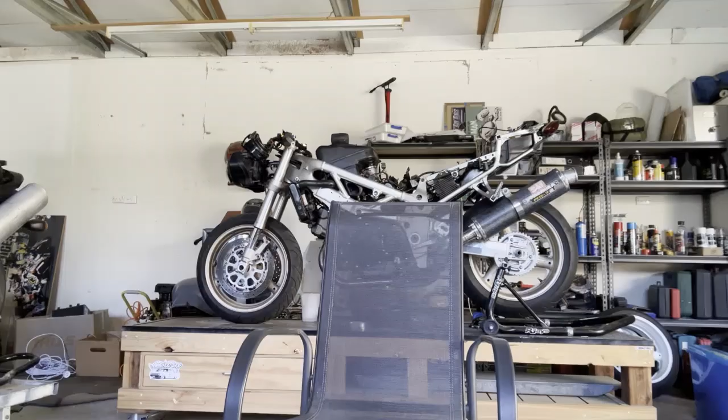Welcome. So what we're going to do now is we're going to do shim replacements for a TLR and a TLS. We're going to do one, both of the same procedure.

So when you're going to do your shims on the R or the S, there's certain tools that you need because you need to take parts off the R and you need to take parts off the S.

But for the purpose of this, when you're just going to do your shims, you need a feeler gauge. I've got a feeler gauge. I take all the bits off because it's a lot easier to handle, I just use the individual bits. You'll need an Allen key, 10mm. Another Allen key, 8mm and 6mm. You need 10mm.

You will need a torque wrench with the 10mm socket, a little 10mm socket. This mill that's a 17mm, so you need that as well. That's for your generator bolt.

Vernier calipers, liquid paper or a marking pen, preferably one that you can see. White, I use this, it's easy. And hands free, like a magnet. Trust me, you'll need it.

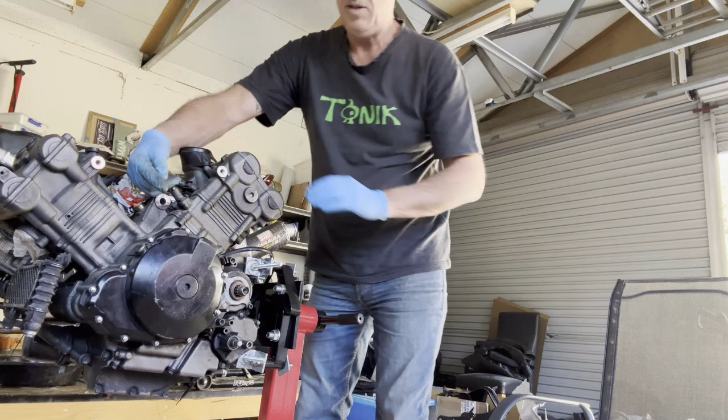So for easy reference, this is how the bike is sitting in the frame. So on the right hand side, the bike rotates in a clockwise direction. So if you think in a clockwise direction, and if you continue doing a clockwise direction, when you get to the left hand side, it's actually anti-clockwise.

So you've got to turn this generator to get it to TDC, and you don't want to be reversing the engine because the cams, sometimes the chains, they can kink. So you always want to go in an anti-clockwise direction. You can do small adjustments by doing it clockwise to get the line on, but we'll show you - majority anti-clockwise on the left-hand side of the R and the S.

So you're about now to start doing the engine. Okay, so just to recap, you've lowered the radiator, you've taken off the fairings on the R. This is for the R. You've taken off the fairings on the left-hand side. You've taken the battery out. You've disconnected the battery box.

I think that's the other way around, you know what I mean. I take the tank off, and you've taken the seat off. You've taken the spark plugs out of both cylinders, and you've disconnected the cam sensor on the back rear cylinder.

And I think that was it. And for the S it was pretty much the same. So I have the fortunate - I haven't done this engine, I've done the R and I've done the S. So I thought I'll do this engine here, so it might enable to get better pictures and angles, plus I have to do it anyway.

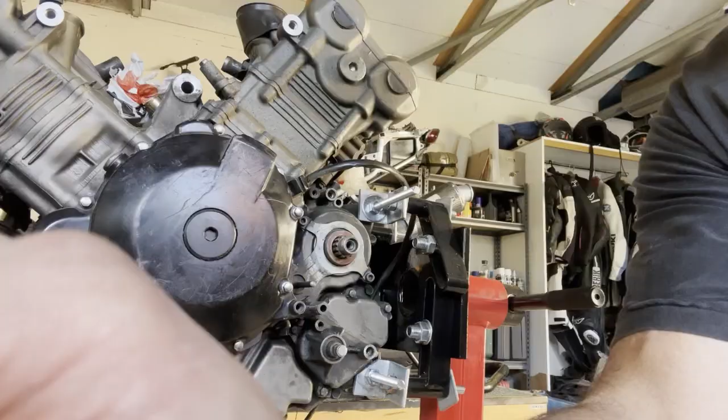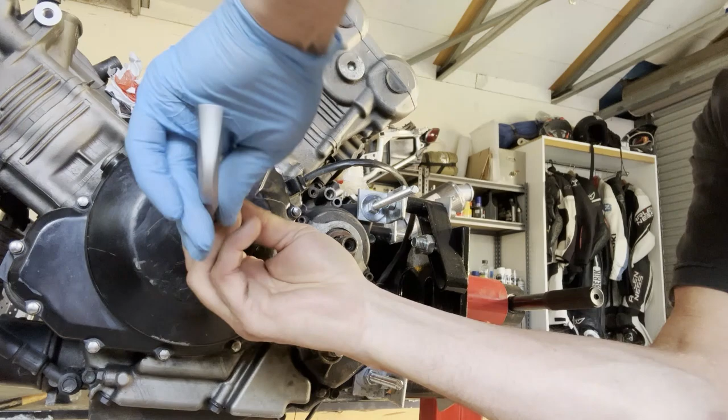Okay, so we're taking this off, this is with the 10mm Allen key. I can see that's going to be a problem, it's not even budging. Oh, yep, be careful. It's a bit gunky in there.

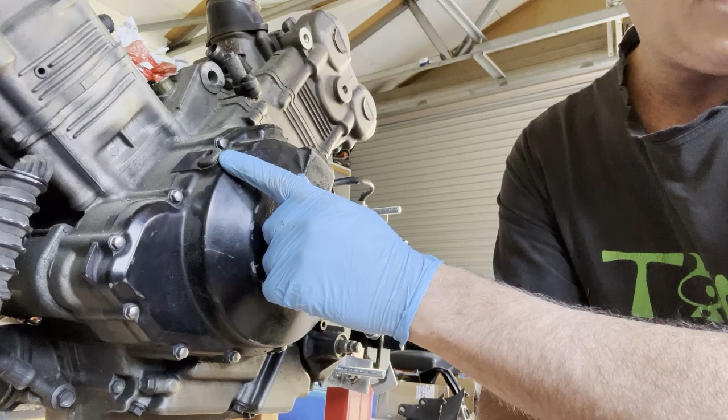So our next thing to take off is the inspection cap. Now that's done with, I think it's an 8mm. Right, so we'll take that off.

The manual tells you to wind it to the FT mark, but it doesn't matter because you need to see the cam lobes on how they are. So I always just take this off first. Don't worry about the FT, we'll take these off first. This is the front cylinder, with the 6mm Allen key.

These have little black plugs on there. One of the reasons why I take the tank off is the tank's got little bushes where it clips down onto the frame, and some people forget about those, so the option is you either take the bushes out or you take the tank off.

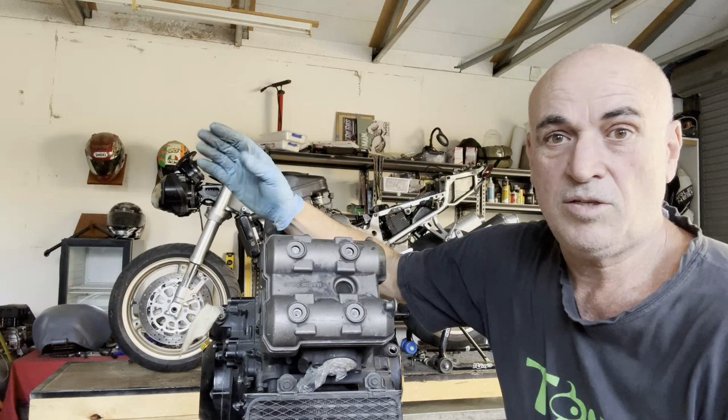It's a lot easier to take off because when this is open and the tank is here, moving around can sometimes knock those out, bang, you're in a world of hurt. You don't have to take the tank off, you can just take the bushes out. They just sit in the rubber cappings that plug into the frame. Anyway, that's something to be aware of.

So once you've got these out, then this will come out. Now it has got a rubber seal on here, so that comes out, which exposes your tappets and your shims underneath there. So you have to take these off. And remember, this is the front.

So this is where you can now turn it around to the FT mark, and it will show you these lobes here. I don't know if you can see that, hopefully you can, how they should be pointing. And then you know you're at your TDC to begin. So we'll just do that.

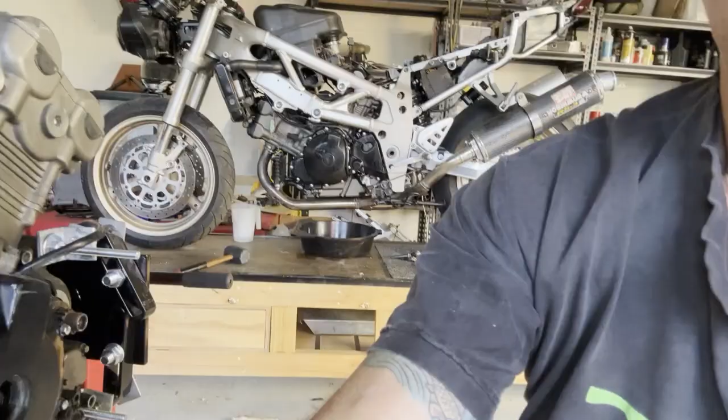So what we'll do now is I'll show you what the inspection is. We've got the torch in here, I don't know if you can see that. So at the moment, where is it? That is basically, there's nothing there. Right, I'll show you what it's like when you turn it round to the FT mark and what steps are taken.

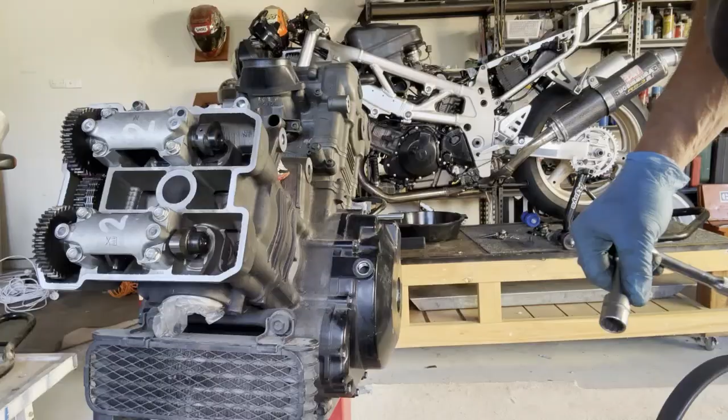So what I'm doing is I'm now turning the generator plug anti-clockwise until the FT lines up there. You don't have to go fast, you can just go slow. That was easy.

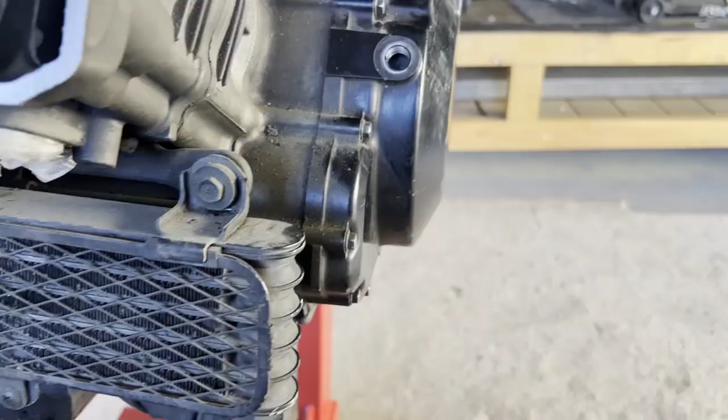So I'll show you what that looks like. All right, so you see there, that's the FT. Now you got to look at that at eye level. So you're trying to, get out of the way, phone. That's FT, and that middle mark in between it is lined up with that little notch there.

So you can see that, that's when you know that it's TDC. But to double check, what you also have to confirm is, if you turn this on, your lobes, they are pointing at roughly 2 o'clock and 10 o'clock. You must have them like that.

If you turn this around to the FT, I can't even get it— if you turn that to the FT and these lobes here are not situated like that, then you need to return it anti-clockwise again until you get that. So once they're in this position here, you know you're at TDC.

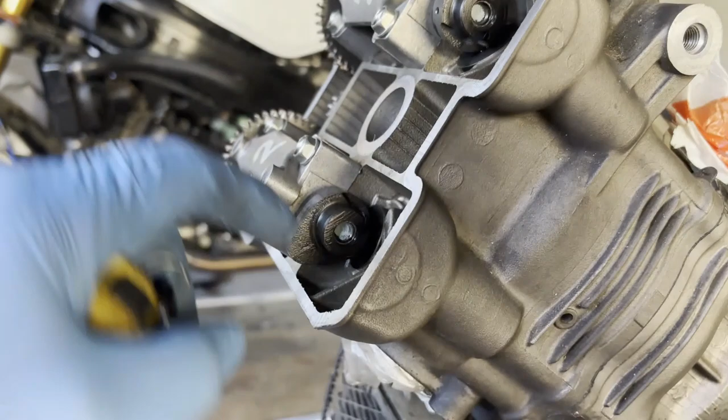So the next thing that you've got to do is, this is where your pad and your pen come in. So you can see that. This is how I do it, sorry. Front cylinder, intake at the top, exhaust at the bottom. And you'll see left and right, and the arrow, that means forward. Now that's not a depiction of what that is.

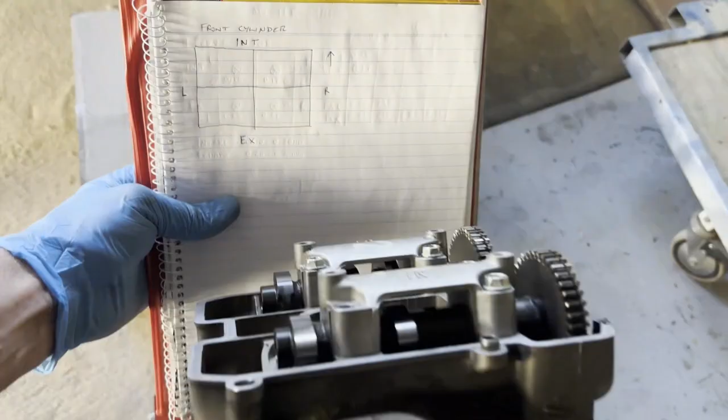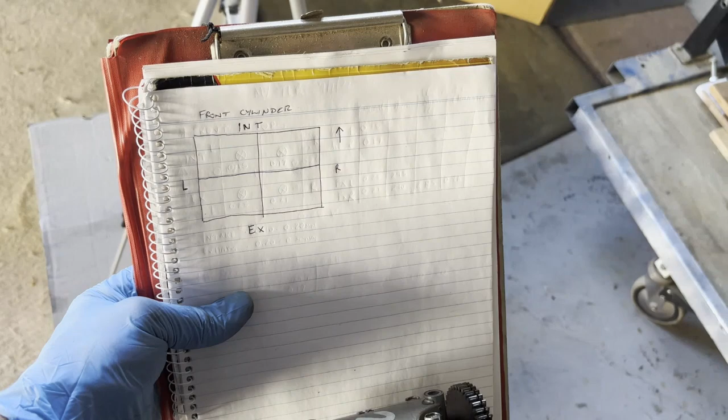What that is, is that. So you've got, I'm on the left side, I'm on the right side, and the arrow indicates the engine is going forward. Intake at the top, exhaust at the bottom. I'll show you, because you need to know this in order to not stuff it up.

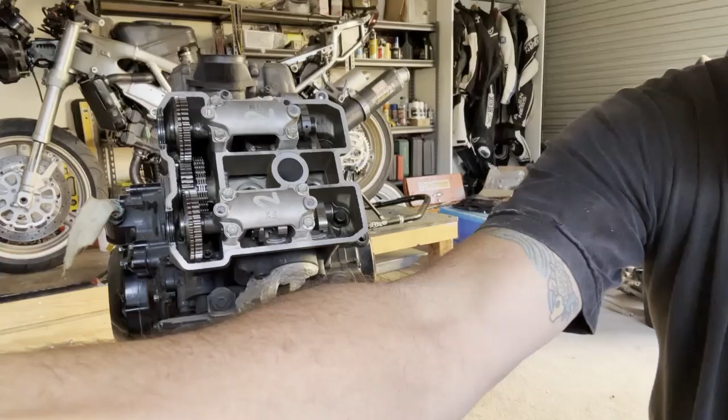So now we're going to measure the shims, right? So the first thing you want to do is measure your intake side, so we'll do that. Now, because it's cold, you're aiming for the shims to be in there between 0.10 and 0.20 millimeter. The exhaust is 0.20 to 0.30. That's the ideal. So the ideal range for these shims is to aim for 0.25. I'll show you what I mean.

So we'll test the size of these shims now. Because you're testing in the lobe, that's got to be between 10 and 20. So we'll get my feeler gauge and aim for sort of like a 15 and see what that comes up with. I don't know what shim sizes these are.

Simple as putting it in that. So that's 15, so that's too tight. Let's go down to a 10. All right, it's not going through, so it's still out of spec.

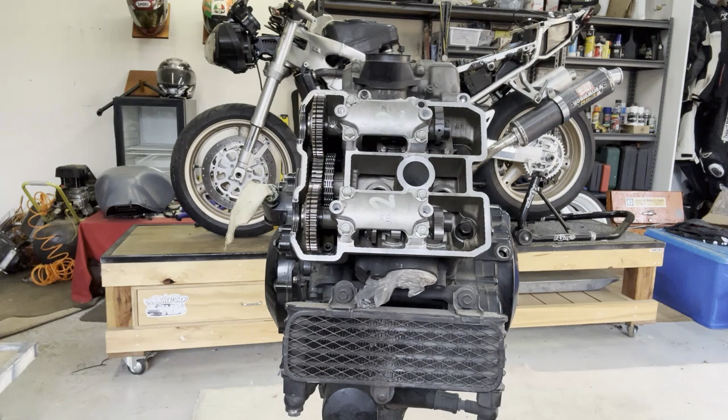So we'll now do the exhaust side, and we're aiming to get between 0.20 and 0.30. We'll go for a mid, which is 0.25. No, that's 0.25, so we'll go 0.23. Nope. So the minimum is 0.20, and this is a 0.20.

That doesn't even go through, so I'll go and change this to find all these. So this is, excuse me, a 0.18, and it goes through. It's pretty stiff, so I'm happy with 0.18, but just to test it I'll probably go see what happens at 0.19.

So we'll aim for a 0.19. We'll use, if I can find it, 0.15 and add a 0.04 together to get 0.19, because we've got 0.18. No, so it's 18. I'll do the other one and record that too.

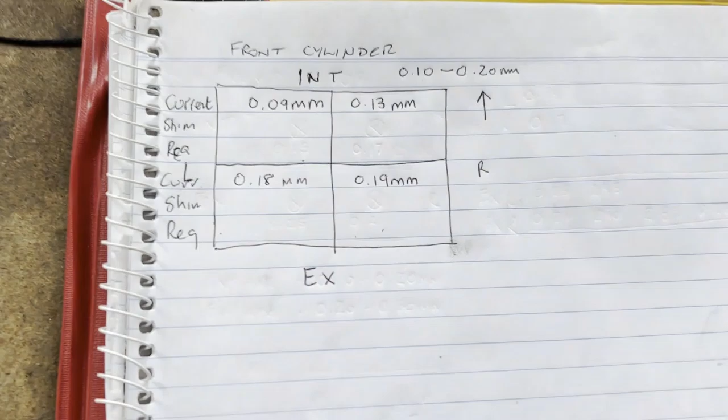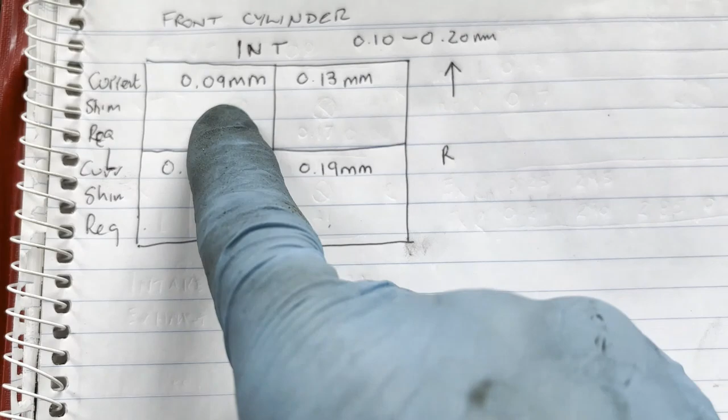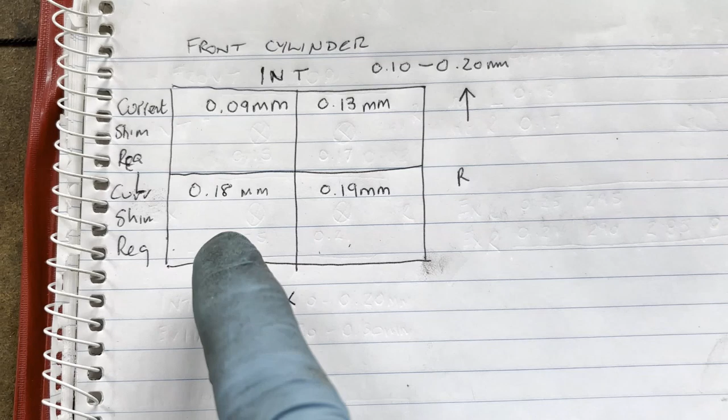So I've done those, and this is what I've got. On the intake, left hand side, I had 0.09, on the left it's got to be between 10 and 20, so that's not in spec. That one is, on the right hand side. The exhaust on the left hand side is 0.18 and 0.19. The exhaust has got to be between 20 and 30.

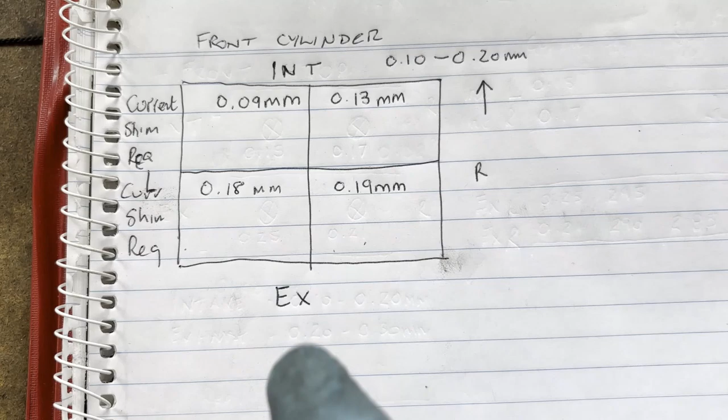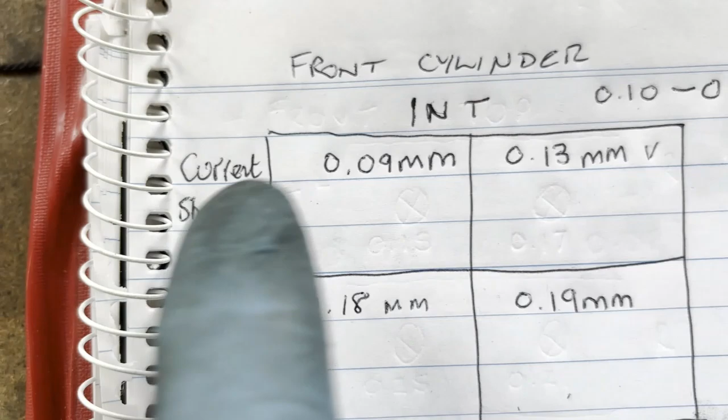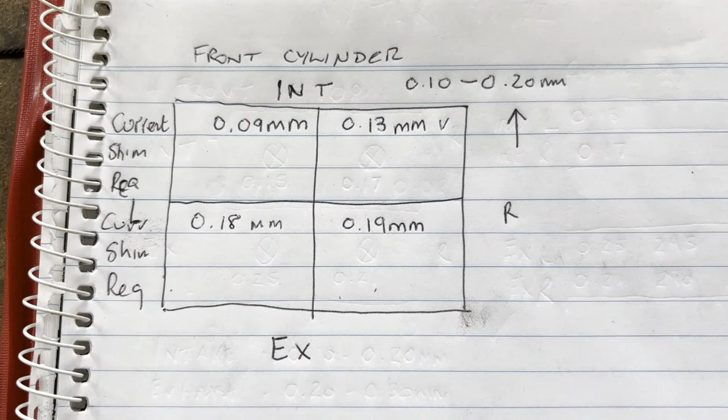So we'll now take the next step, because this one is correct and these aren't. I've got the current measurement, the shim, which we'll find out, and then the required shim to bring it into spec. That's on the front cylinder. So we'll now go and take the shims off to see what shims are in there.

Another thing to be careful of, now your engine is open when you take these out, you'll see there's a little bushing up here. Grab that out of the way. There's that one, and it goes in the case. So just make sure you've got those two out.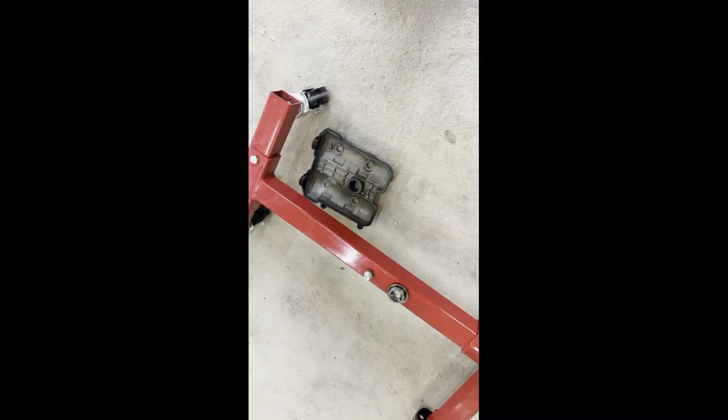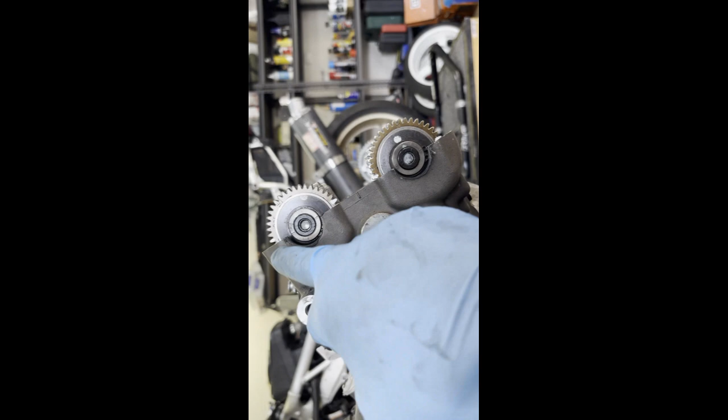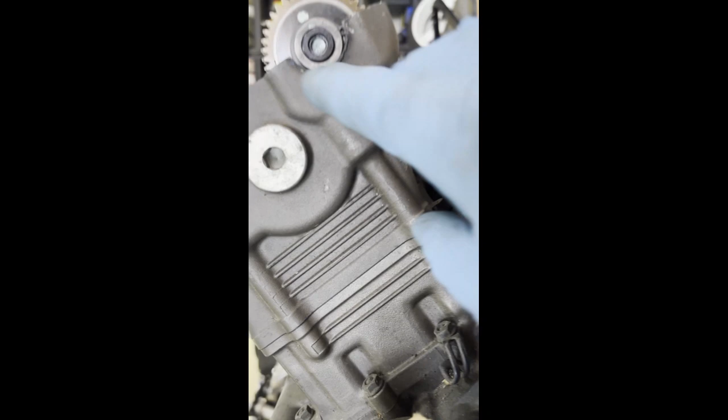What we'll do now is take off the exhaust. In relation to the liquid paper, it's placed on that so when you eyeball level with the top of the case, I just liquid paper the last tooth that I see. You can go by these little dots, but that's if you change it, because sometimes they're not even. People spend hours trying to figure out how to get them even, but I find this is just the easiest way to do it.

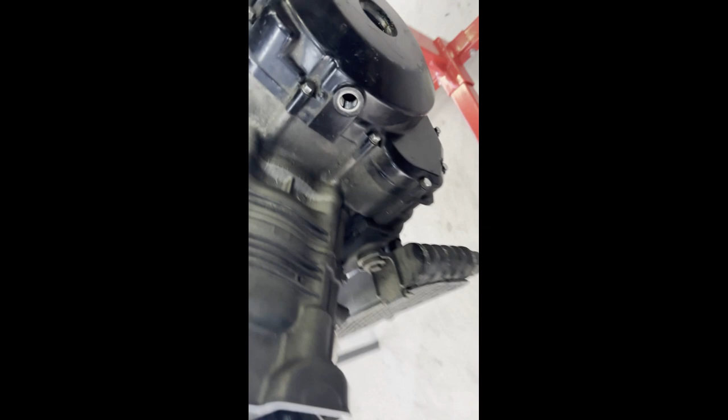Because we need to take these out now, I'll end up taking all 4 of them off. We're still on the front cylinder. We haven't, oops, wrong side. We haven't altered that, it's still showing, you probably can't see it, but it's still showing as FT. You don't want to move this while you do this.

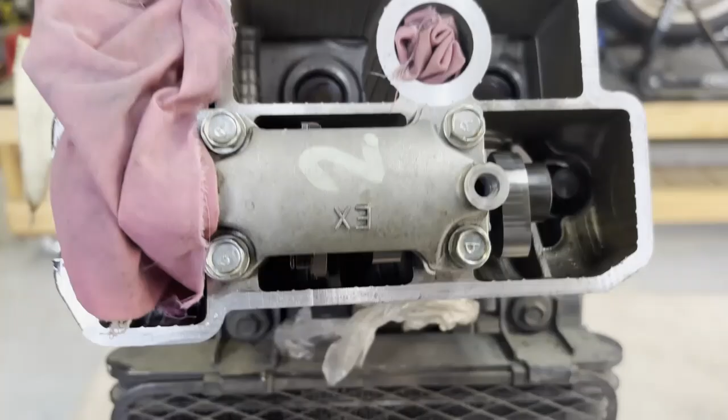So we'll take these off and let's have a look. Forgot to mention, although I plugged that up here, under these caps are those bushings, and sometimes they come out. So you need to take out those 2 bushings.

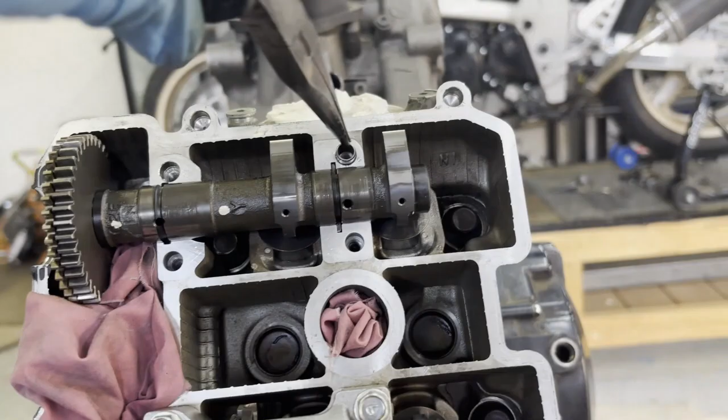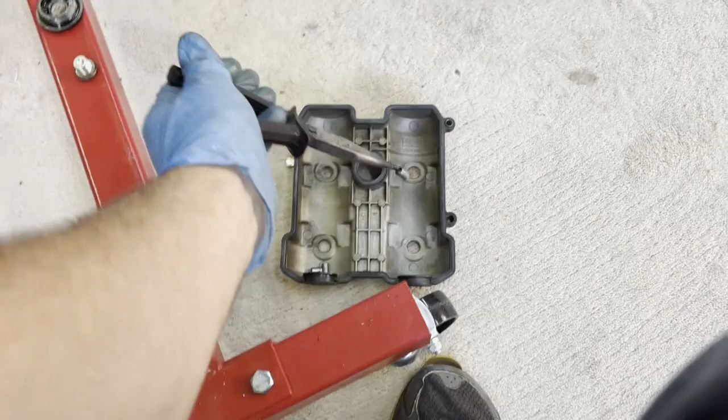By taking this top one out, and underneath here there's a little C-clip, I'll show you when it comes out. So when you take these out, the intake is not the same as the exhaust, so you won't have to worry about it. You'll see when I take it out, but you just want to be careful when you take it out.

You've got those C-clips, then you've got the buckets, that's where the shims are under. So I'll put this aside, and then we'll measure these and take this off. So again, we've taken the exhaust side out. They've got those bushings in there, grab them.

Take your exhaust side out.

These are the C-clips I'm talking about. There's one up there and one up there. They just sort of slide out. Oh, bloody hell, they're slippery, they've still got oil on them. That's why I suggest using pliers.

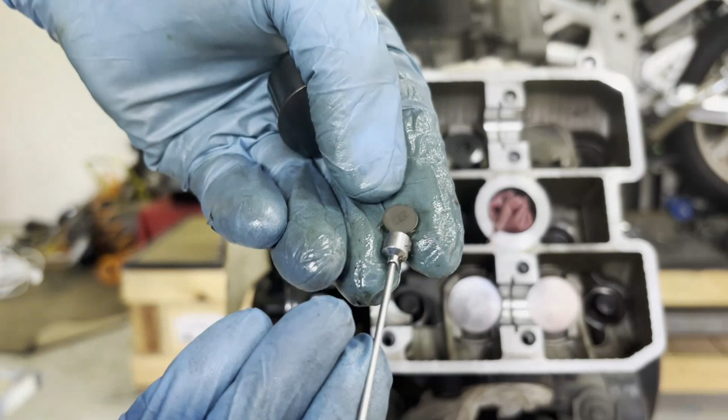So we'll recall what shim this is. Don't know if you can see it. So that says it's a 2. Hang on, can you focus on that or no? So it says 2, oh, you can't see it, it's too shiny. It says 272.

So I measured the shim, 272, which is what is written on that shim. Now that's out of the right hand side intake, and this was in spec, so we don't have to change this one.

So I've put that shim back, you'll see it's 272, it's upside down. You don't have to do that, but the numbers want to be there so you can read them. They face upwards. I'll put some oil on that.

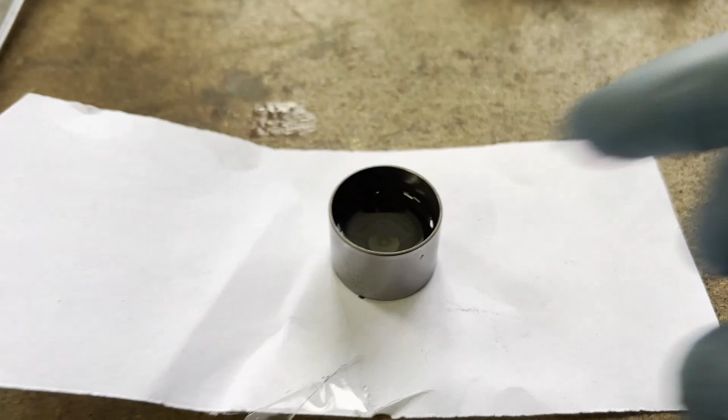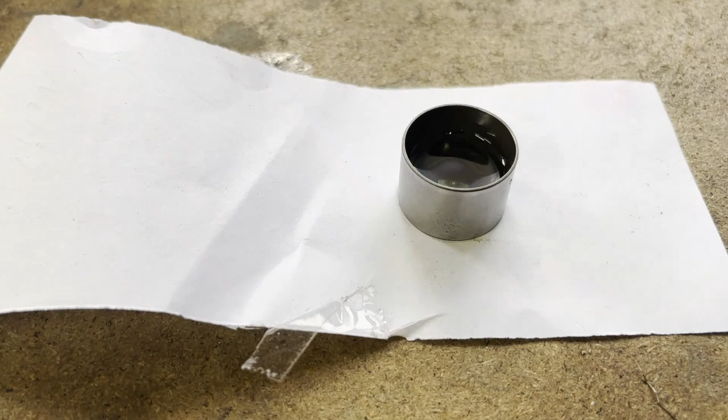Another test that we do is the buckets. You just want to make sure, clean it all out. I've just got some trans fluid in there because these buckets get hairline cracks, especially in, it seems to be the northern hemisphere, not so much in Australia. We don't get that problem, so there's no leaks there, so that bucket will go back on that shim. I do that with all the buckets.

So I'll now take out the left-hand side intake bucket.

275. I don't know if you can see that, but that says 275. So we'll record that.

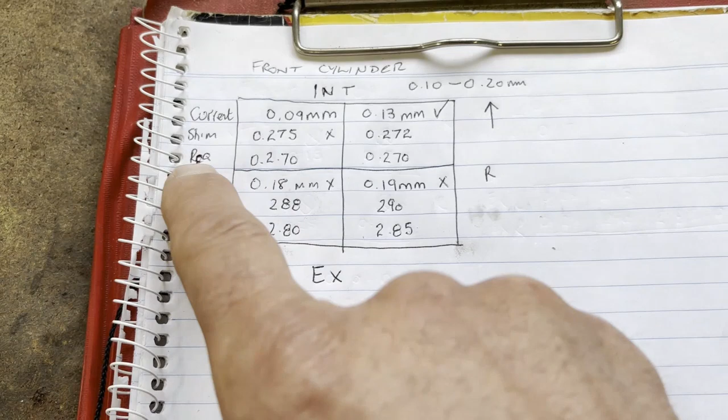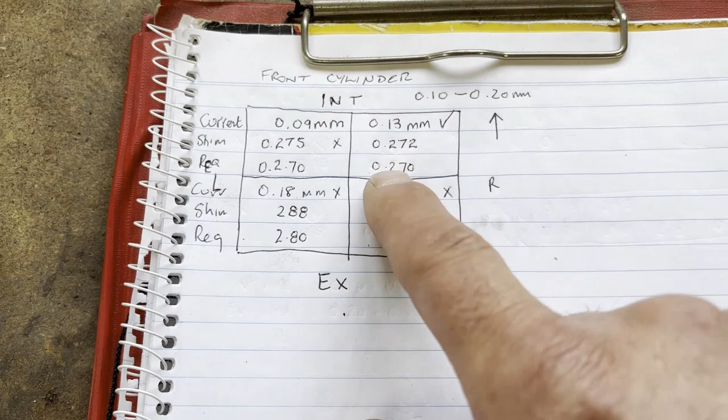Okay, so I have already taken out my intake shims and I've recorded it. So this is what I found, this is the chart that I had. On the left hand side had 0.09mm, and that was the current shim, 275. On the right, which was compliant, 0.13mm and a 272. External, the exhaust side, 18 and 19, and that was the present shim, 288, 290.

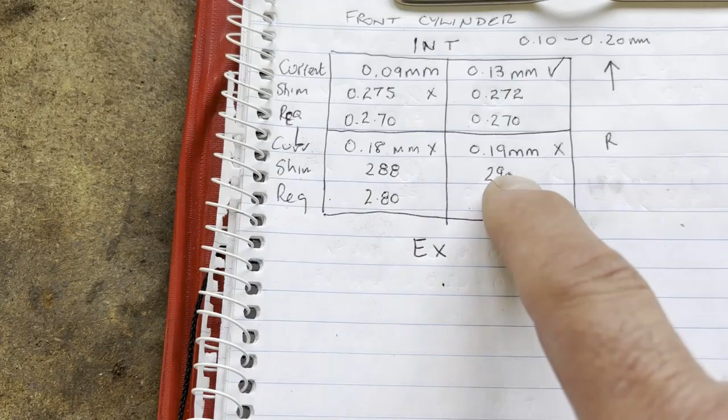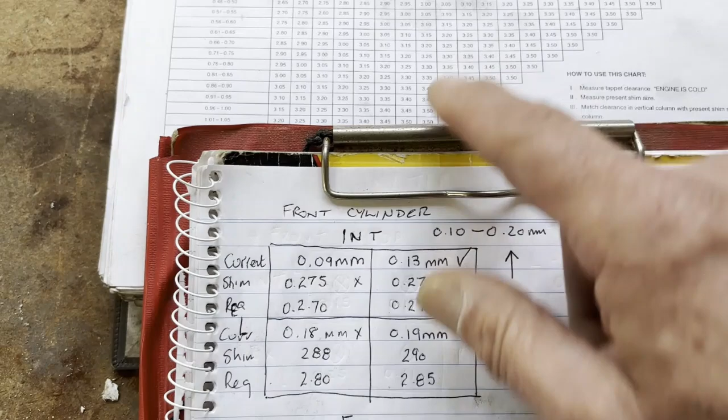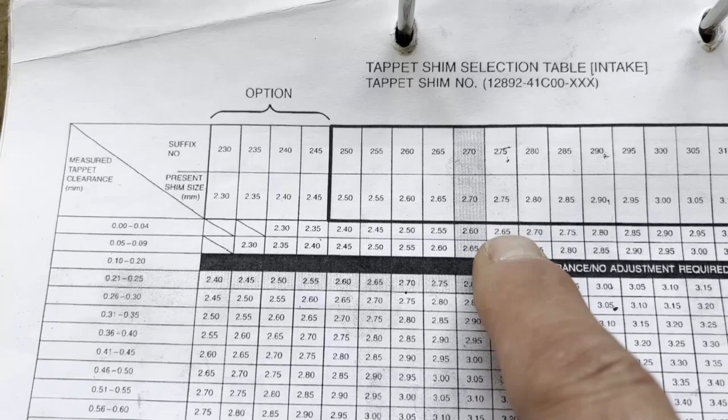So what I've done is, if you go to the book, I'll show you here. So this is for the intake in the manual. So we'll do the first one, which says that it's 0.09 and it's 275 the current shim. So you go to 275 up here, bring your finger down to 0.09. So my new shim is to be 2.70, which is my new shim.

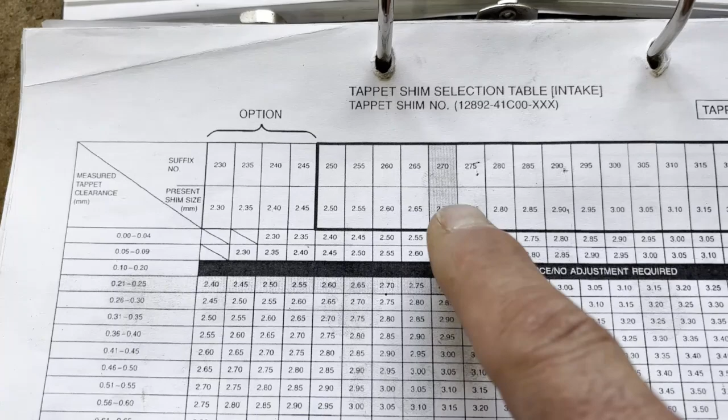My shim here for the right hand side is 0.13mm, and it was a 272. So because it's a 272 and they have 0.05mm increments, I've gone to 270. And because that was 0.13mm, it is in compliance, so I'll just go down to a 270 anyway.

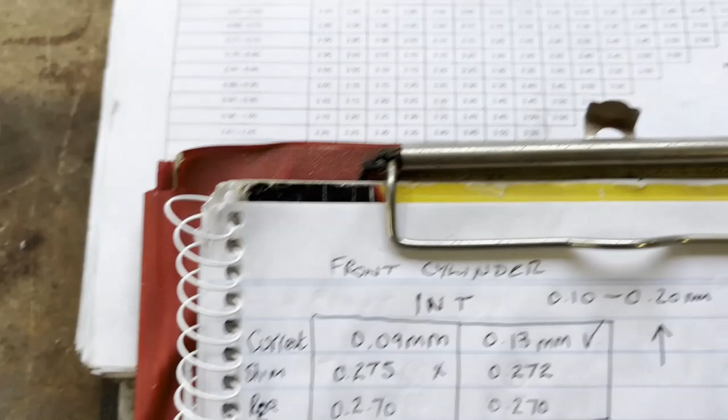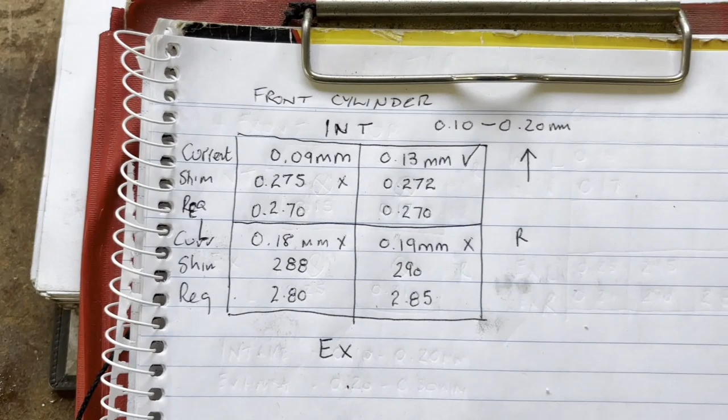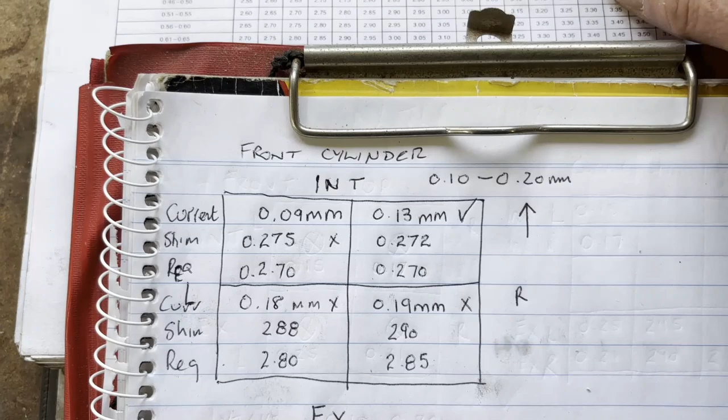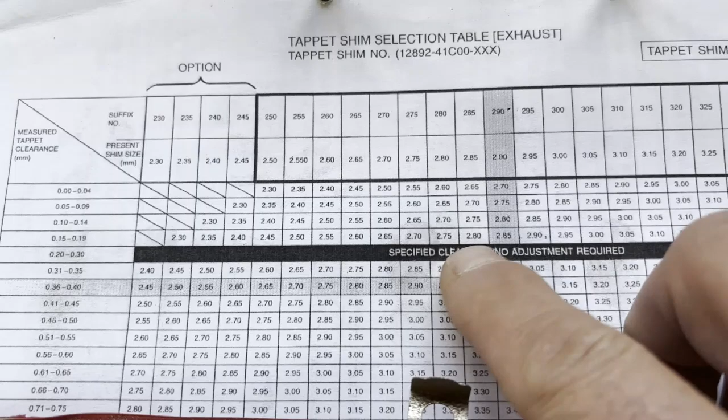For the exhaust, what we'll do is we'll flip the page to the exhaust side, this is the exhaust side. So the exhaust side is showing 0.18mm, 0.18 millimeters out, and the shim was 288. So if I go to, I'll bring it down to 285, and remember it was 0.18, so we'll go to the column 0.18. So my new shim is to be 2.80.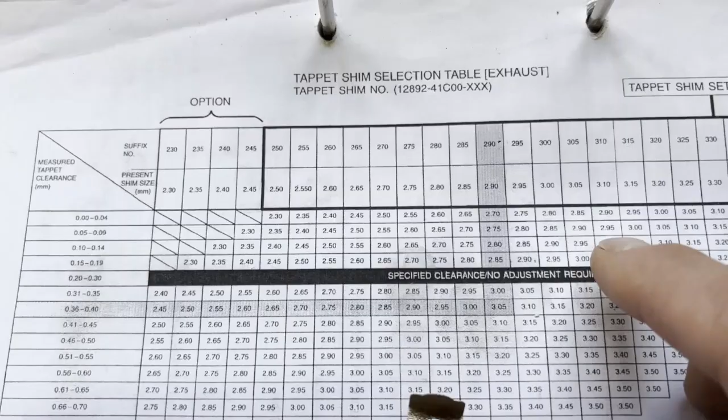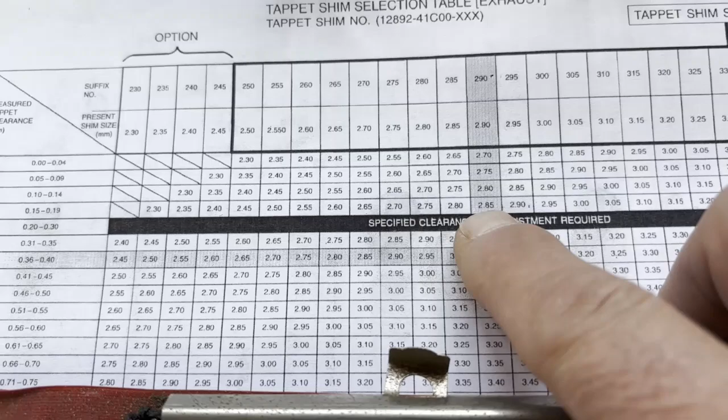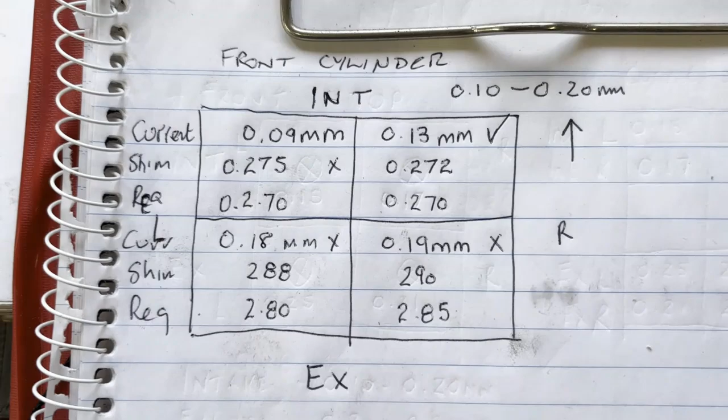My other one, the exhaust on the right hand side, was 0.19, and it had a 290 shim. So we'll go to 290, go to 0.18 here, and it says my next shim to get is a 285. So they're my new shims to get: 270, 270, 285, and a 280, which will bring it up to spec.

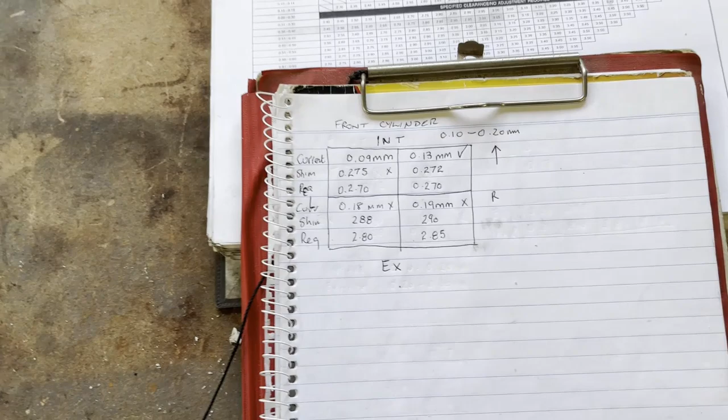So I've already done the external, on the, I keep saying external, I've already done the exhaust on the front cylinder, and I've ordered these. So this will be part one. So what I'll do is I'll order all my shims, and then I'll go back and I'll show you how to do the rear cylinder.

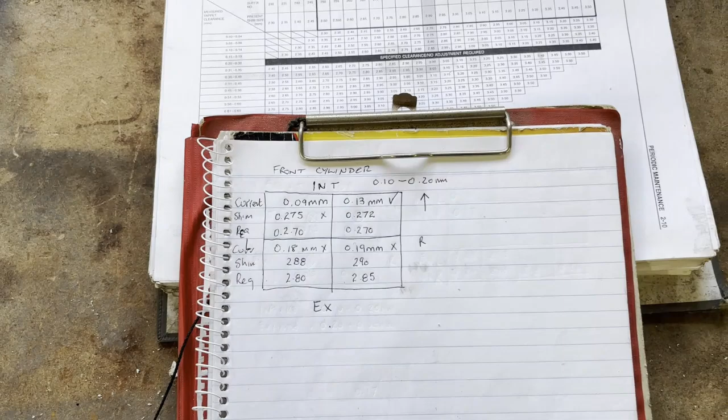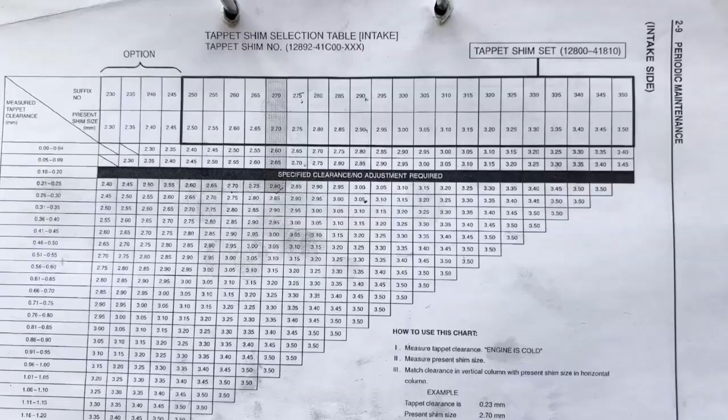Okay, so I know this is a bit long-winded, but it's to give a basic idea on how to actually do it. So if you've got these, if you haven't got this manual, see if you can sort of get a free sort of look in there. That's for internal, I keep saying internal, intake, idiot. And this is the exhaust side, so the exhaust side shows you there.

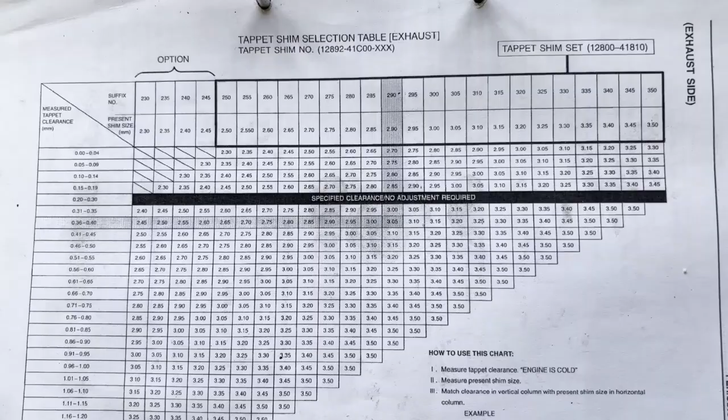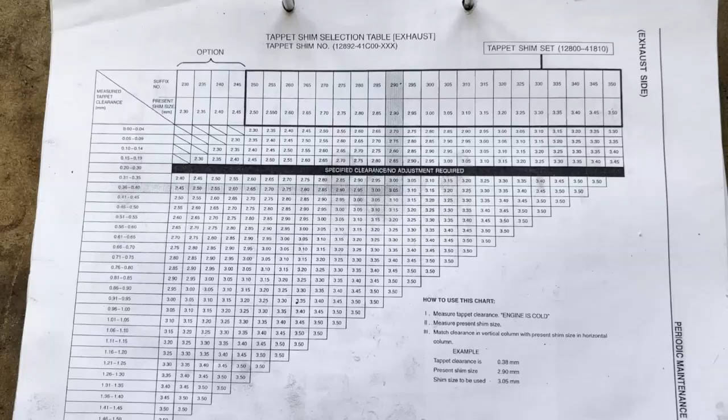So stay tuned for part two. I hope this was clear. I know it's long-winded, but hopefully it'll help you out. I expect part two to occur probably in the next couple of days or a week. Thank you.